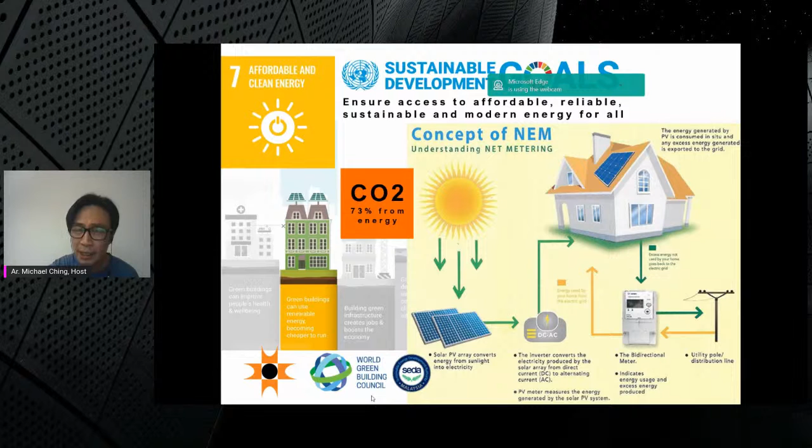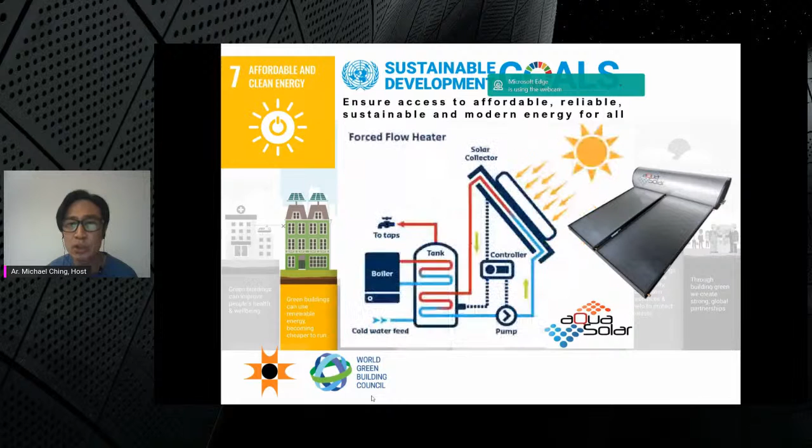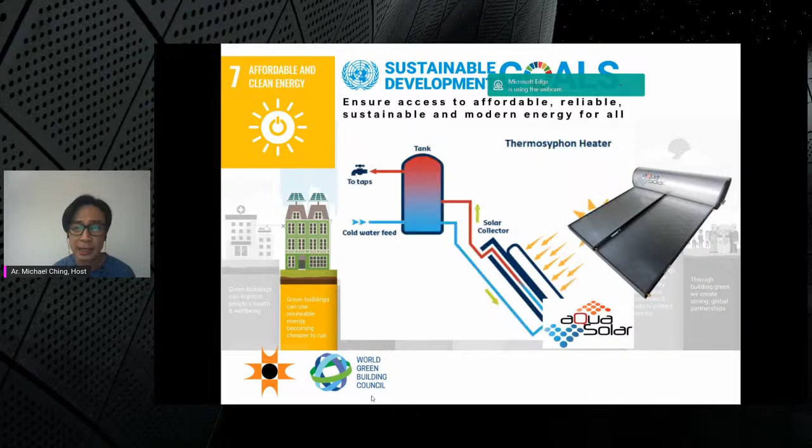Second is to use solar energy. Of course, as I mentioned, there are plenty of solar energy options. This is just one of the concepts. This slide is from Eugene, who's not around today. Basically this is solar energy, solar heater. What they use is solar heat to heat up water, and they use it for showers and other water heating needs.

Next, goal number 8: green building. Creating green building infrastructures creates jobs and boosts the economy. From statistics, green building saves US dollar 440 to 500 billion yearly, through reduction of energy, reduction of water, and savings from materials or construction. Total yearly annual saving is 440 to 500 billion.

There's a lot of money saved. In addition, in overall global statistics, the green building industry creates 18 million jobs yearly, based on last year's statistics in 2020. Renewable energy, like solar that I mentioned, alone creates 2.3 million jobs last year. So the green industry spurs the economy, and the savings can be used for other purposes to spur the economy.

Goal number 9: green building can spur innovations and contribute to climate resilient infrastructure. Just now was about creating jobs and savings. This is how it spurs innovation. We know that the World Green Building Council, by 2050, is planning to achieve advancing net zero for all buildings. What is advancing net zero? Basically, by 2050, all new buildings will not use any energy from the grid. In Malaysia terms, you do not need to use energy from TNB.

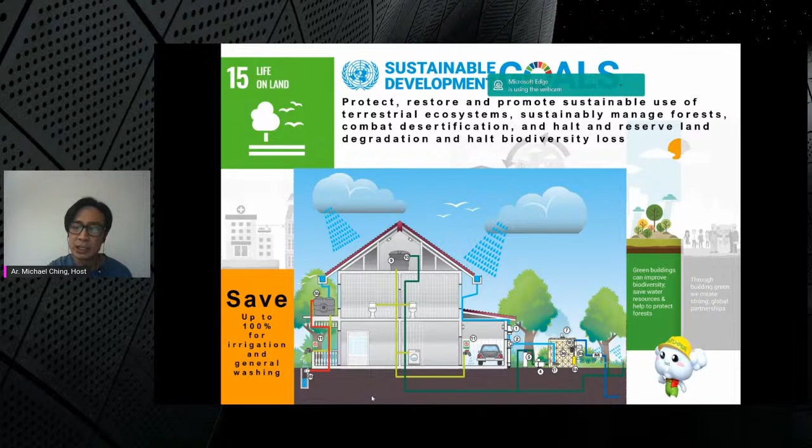Of course, coupled with that, there are strategies where some of them need a pump, and some of them, like the diagram on the left with the red diagram lines, have the rainwater harvesting at the first floor, where you do not need any pumps for irrigation on the ground floor. Whatever is on the ground floor, you just use gravity. So these are the strategies used to reduce water consumption.

Last but not least, through the green building communities, through green building practice, we actually create strong global partnerships, and that is the goal. We can't do it alone. We need to do it from a global perspective.

So from the statistics from the World Green Building Council, 631 billion is actually allocated to development assistance to help whichever country requires it. And out of that, 76% has already gone as remittance to developing countries, to help them work to achieve the SDG goals together.

Today in Malaysia, the organization championing green building and green cities in the built environment is the Malaysia Green Building Council. They are adopting these 9 goals to reduce CO2 and also to promote the SDGs. They are an established member of the World Green Building Council, so they work very closely with the council to promote and make the SDGs successful.

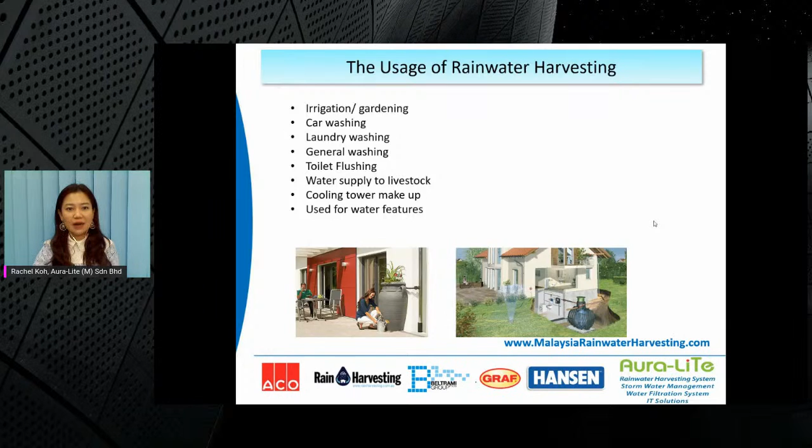In Malaysia, on 14 June 2011, we already said under the UBBL that rainwater harvesting is a must, especially for new semi-D, bungalows, and government buildings. So this is a good move by the government to promote green building and also rainwater harvesting systems.

The benefit of the rainwater harvesting system is that we provide an alternative water supply to supplement the piped water, so we don't have to depend on Air Selangor water or the piped water, because when the pipe bursts or there's a water shortage, we can use the rainwater as an alternative. Then it's a green approach. It can reduce the dependency on treated mains water.

Of course, it can reduce the flood risk because of the storage concept. It's proven by DBKL, because DBKL has made every developer, like semi-D or terrace house or bungalow, have a rainwater harvesting system. So by storing the water, it can help to reduce the water discharged to the drain, and it can help to reduce floods as well.

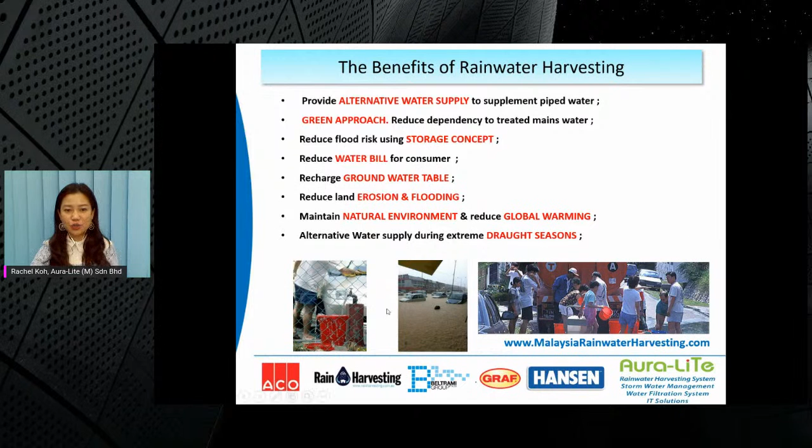You can reduce the water bill for the consumer and recharge the groundwater table, and of course reduce land erosion and flooding, maintain the natural environment and reduce global warming, and of course provide an alternative water supply during extreme drought seasons. So all these photos that I show here are actually from Malaysia.

So this is the Malaysia domestic water consumption study. From the slide, we can see that this study is a collaboration between the Federation of Malaysian Consumer Associations, FOMCA, and the Energy, Green Technology and Water Ministry, started in 2007 and ended in 2010. And the study covered 1,792 households in the country.

So if you can see from the chart, toilets can reduce by 26% if you use rainwater. General washing is 16%. Car wash, gardening, exterior and internal cleaning is under general washing, 16%. Washing machine is 22%. So all three add up to 64%. If all three can be replaced by rainwater, you can save up to 64% of the water bill.

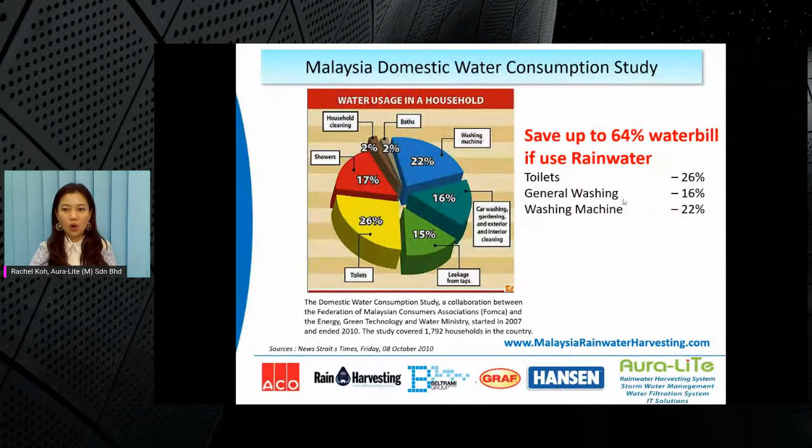One of the reasons Malaysian washing machines use up so much water is because a lot of people use top-loaded washing machines, because they're cheaper compared to front-loaded. And front-loaded saves more water compared to top-loaded.

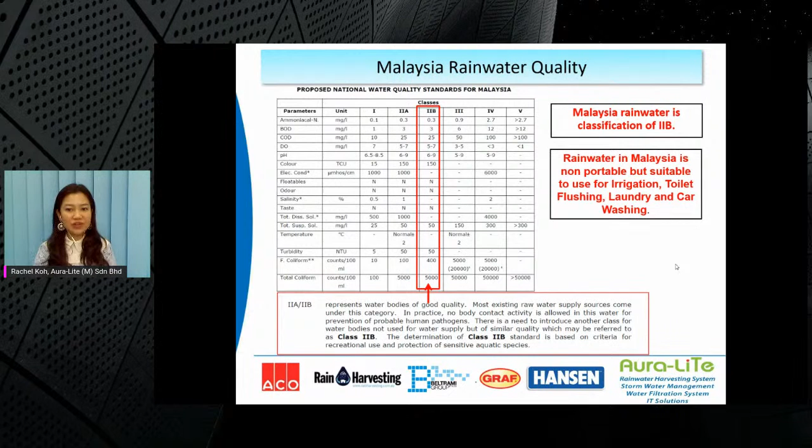It is classified under class 2B. But it's not potable. Non-potable means you cannot drink it, but it's suitable for irrigation, toilet flushing, laundry, car washing, and general usage. These are the water quality results tested in the Environmental Laboratory, Faculty of Civil Engineering, UTM in 2005.

This laboratory found the rainwater pH is 5.58. Johnson says our skin needs pH 5.5. So it's not as acidic as people think, that it will make you botak, make you bald. So this pH is slightly acidic, and for ammonia and turbidity, it's clear. The water is soft water.

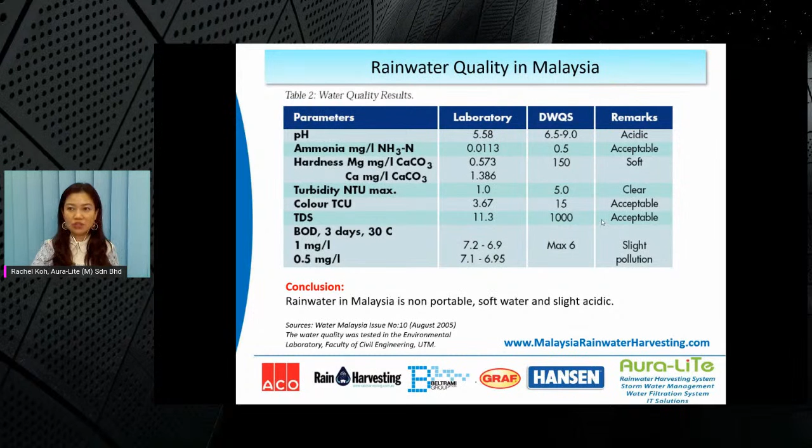The rainwater is soft water. That is why in Germany and in most European countries, people use the rainwater to do their laundry. Because in Europe, most of the water is hard water, so they use a lot of soap, a lot of detergents compared to Malaysia, to our Asian countries. So that is why they use the rainwater to do the laundry. And it's slight pollution. It's not that bad after all.

And what is the advantage of our Aura rainwater system? It's high quality, durable, and high water yield. You can collect more rainwater. It's a safe design. It's Aedes proof, because Malaysia always has a lot of problems with Aedes. So when you harvest the rainwater, you must be careful about the Aedes issue. It's good water quality, no downpipe blockage.

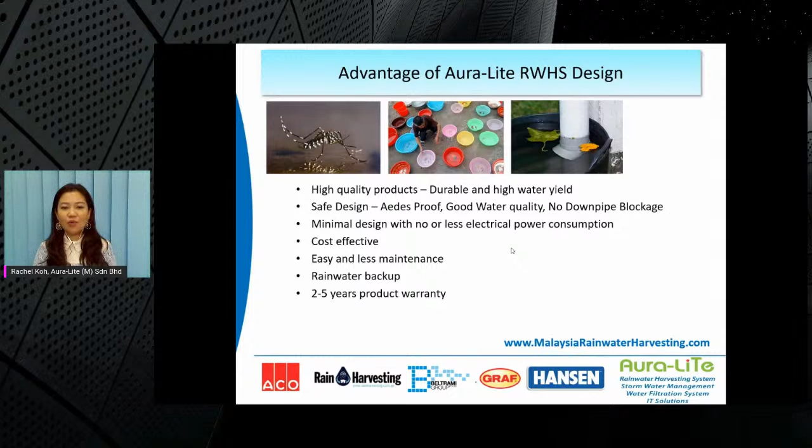And we also have a minimal design with no or less electrical power consumption, meaning that we do not encourage using a pump if possible. And it's cost effective, easy, and less maintenance. And we have a rainwater backup. If, let's say, there's no rainwater, then we have a backup for you from the mains water. And our product warranty is 2 to 5 years. So let's show the video here.

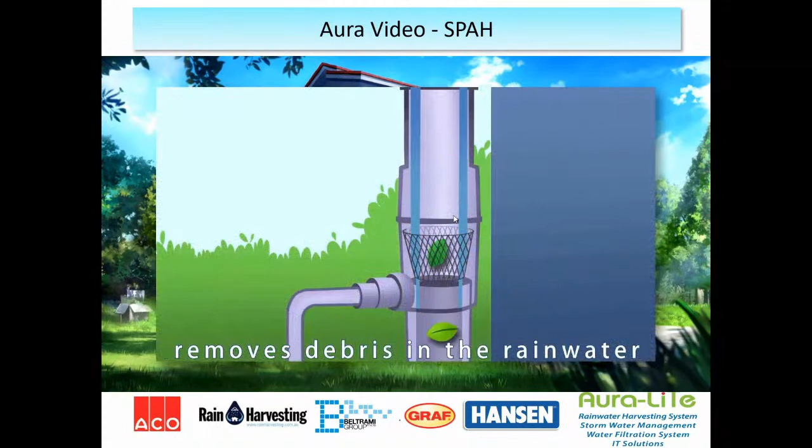Whee! I'm Aura. Let me introduce the rainwater harvesting system to you. The dark clouds are huddling together. That's my cue. Let's go! The rainwater harvesting system collects the rainwater for car wash, clothes washing, and cleaning toilets. It is even clean enough to water plants in a garden. Firstly, the fallen raindrops are collected through the rainwater downpipe. Next, the leaf filter in the system removes debris in the rainwater, such as leaves and branches.

There are dissolved contaminants in the rainwater. Thus, in the third step, the first flush of contaminated rainwater is diverted into a chamber and will be discarded via the dripping method. Once the chamber is full, clean rainwater flows to the custom-made rainwater tank. Lastly, the clean harvested rainwater can be recycled and reused. Let's go green with Aura and bring rainwater back to your home.

Okay, thank you. This video was actually created by us 2 years ago during our 10 years anniversary to educate the children, the schools, the public on what a rainwater harvesting system is. It's one of our CSR projects, because doing a video is not cheap at all.

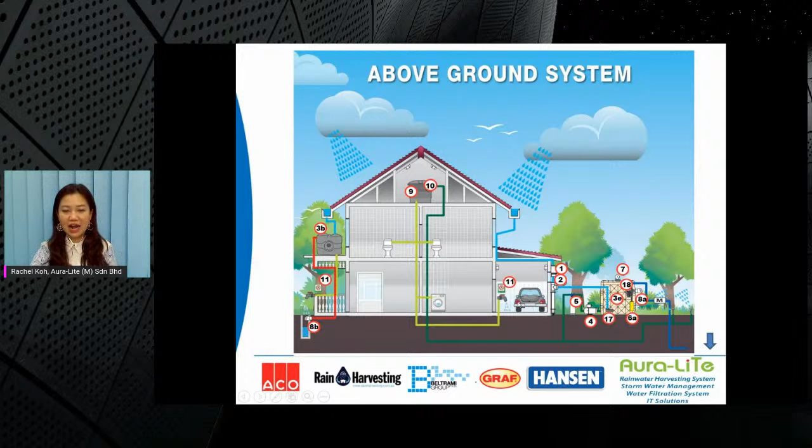So this basically is an above-ground system. If you can see, we can have a rainwater system here. The tank can be here, so we do not have to use a pump. But if you put your system here, then you need to use a pump to pump back to the system and go to the toilets, the laundry and car wash. And these are our filters. Just now you saw the filter; these are leaf filters, and also to prevent mosquitoes from entering the system. And this is the first flush system.

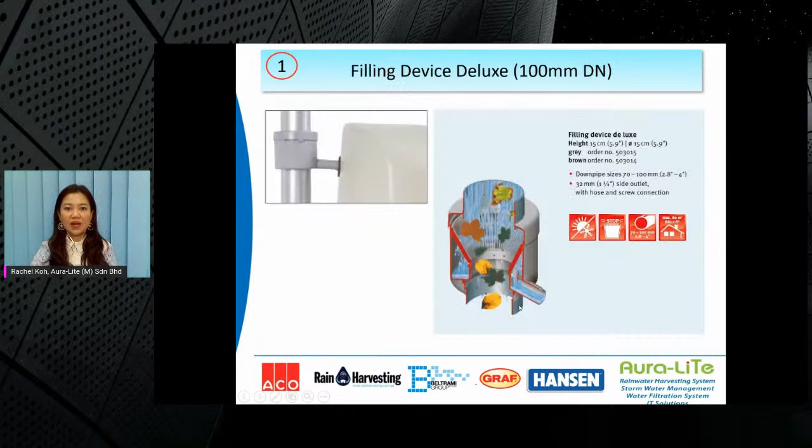First flush is because Malaysia is a Muslim country, so we do not want to touch the bird droppings. So we want to prevent the bird droppings as well. So the first flush in Malaysia is a compulsory system, and the first layer of the roof water contains bird droppings, sediment, fine sands, mosquito eggs, micro pollutants. All these cannot be filtered by the wire mesh. So you need to use the first flush diverter to divert the first layer of the roof water so that the rest of the water will be clean.

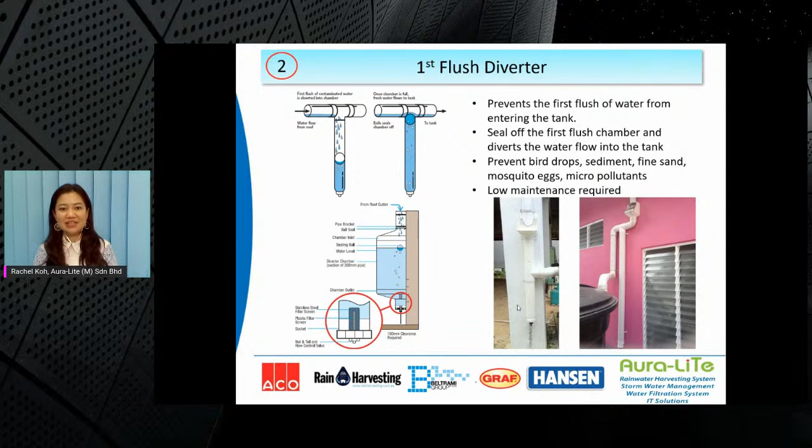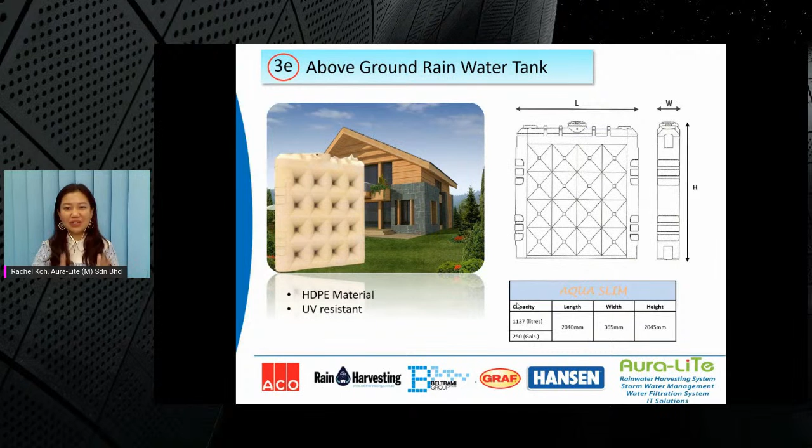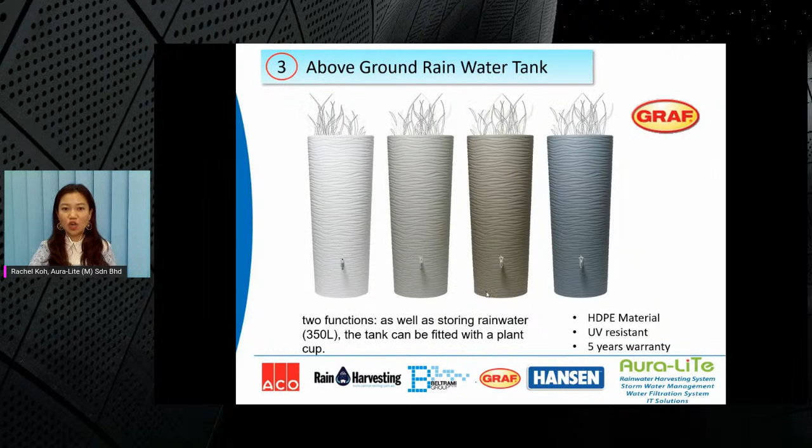And this is our above ground rainwater tank. Somebody told me this is like a tilam. Actually, this one is to be put against the wall so that you can save space. So this is a Roman pillar. It's one of our tanks as well. And this, I always call this a zebra tank. It looks like a zebra to me. So it's dual function. You can put plants on top, so it can be a planter box, and the bottom is a rainwater tank.

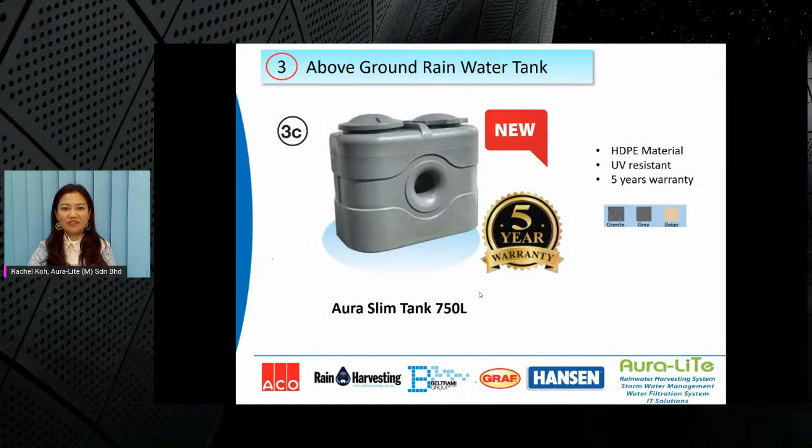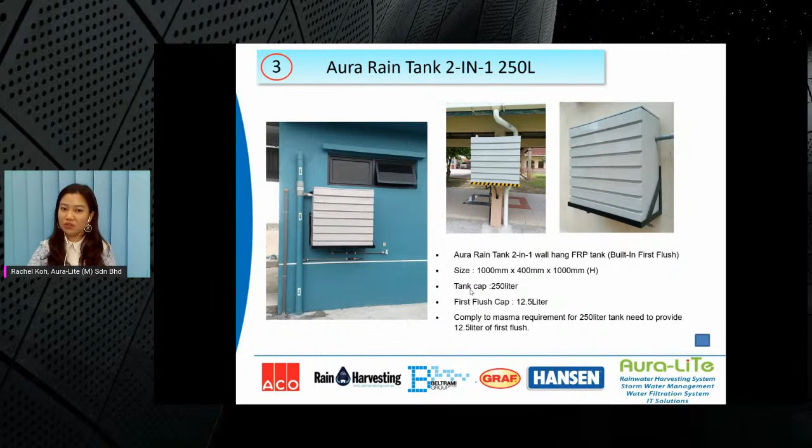And this rocky wall tank as well. It's cool. It's nice, isn't it? And we have this one, the slim tank, with 5-year warranty. And we have the Aura planter tank as well, 300 liters. And we have this tank, 250 liters, 2-in-1. You can hang this tank on the wall, and you do not need to use a pump. You can reduce the consumption of electricity.

And there's an underground system. So underground, basically, because a lot of households, a lot of bungalows nowadays, when they design, they do not want to see the downpipe.

They want to conceal the downpipe. So when the downpipe is concealed, you cannot see the downpipe. Then you cannot put the filter and the first flush above ground. So you need to do an underground system. Therefore, you need to use the pump to pump to your system. Of course, we have some system to prevent mosquitoes from entering and to improve the quality of the rainwater system.

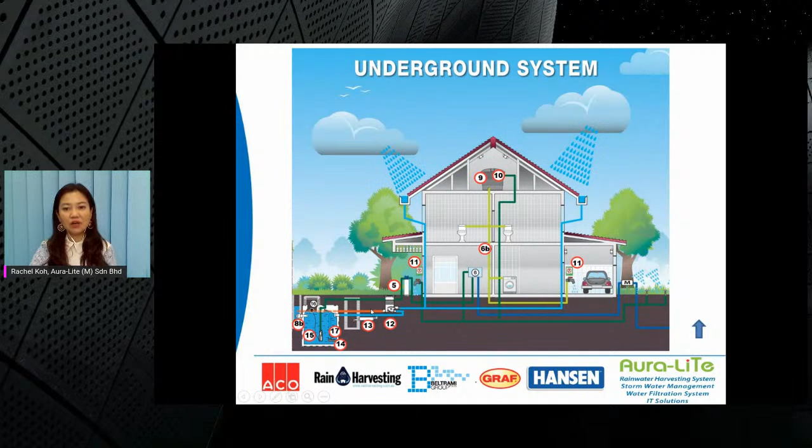Okay, thank you, Rachel. Why don't we start off with this question? Just now I talked about the SDG. So I just wanted to know which SDG goals your company is implementing, both directly and indirectly. My company, business-wise, we are actually goal number 6. Okay. Number 6, clean water and sanitation.

So inside clean water and sanitation, they have a few breakdowns. They have safe drinking water, sanitation and hygiene, water quality, water-related ecosystems, integrated water resources management, and also water efficiency. So I think I'll put it under 6.6, water-related ecosystems. That means we recycle the rainwater and incorporate it in the design so that we can reduce the dependency on treated water. So we can help people save a lot of money and water. Yeah, up to 65% reduction in your water bill.